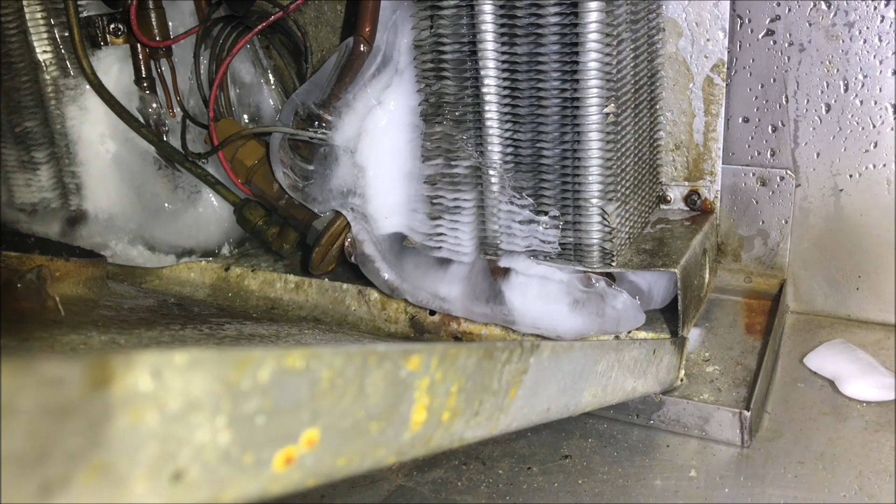Alright, so the first check we're going to do is check for a frozen evaporator coil. And the possible causes for that could be faulty evaporator fan or blade, a bad temp controller, which is super common. So our temp controller is set to whatever setting between 1 and 9, and it's a cooler. We're going below 32 Fahrenheit. Condensing unit is still running. Chances are you have a bad temp controller. If we have a backed up drain, if the door is not closing properly or sealing properly, and in a freezer we could have a bad defrost element, probe, or defrost clock.

Alright, so the next thing we're going to do is check our fans. So in this case we have two evaporator fans. Okay, in this case they are both running. We want to make sure the fan blades are not damaged. And from here we're going to move on down to the condenser fan and make sure it's running.

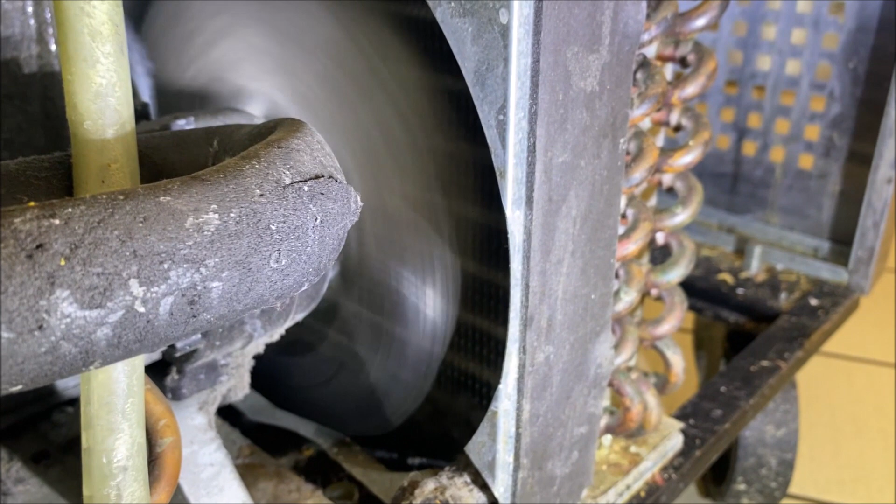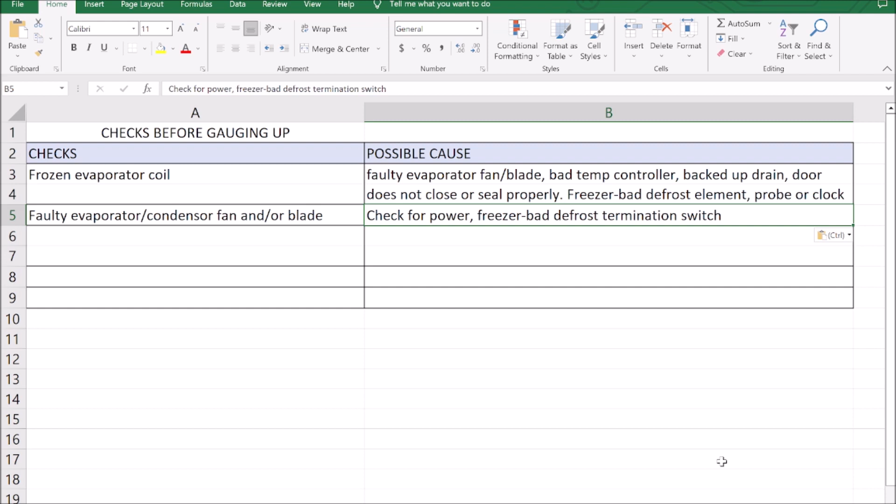Alright, so as you can see from there, our next check is to check for a faulty evaporator or condenser fan and or fan blade. And if we do have a bad fan, we want to check for power at the fan. And if we have a freezer, we want to check for a bad defrost termination switch and then replace as needed.

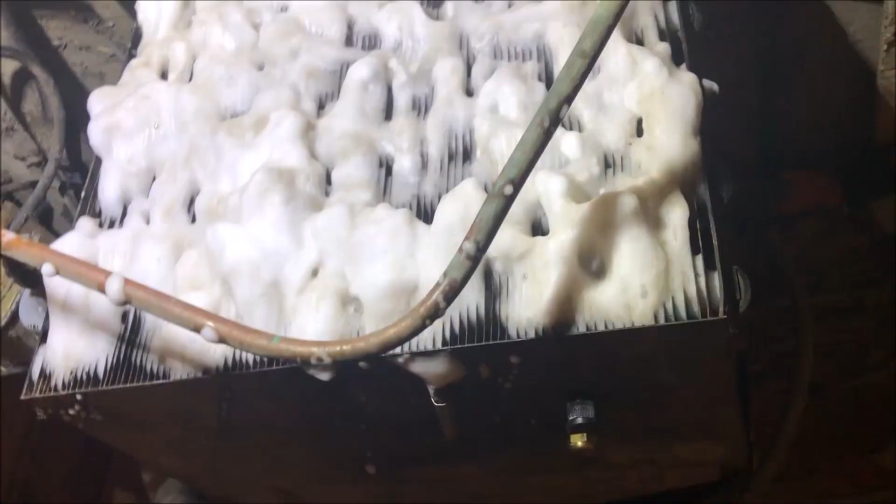The next thing we're going to check is the condenser. Is it dirty? Is it plugged? So we're going to use a brush and then we're going to just hit it up with Viper spray and shine a light through it and make sure everything's good and clean.

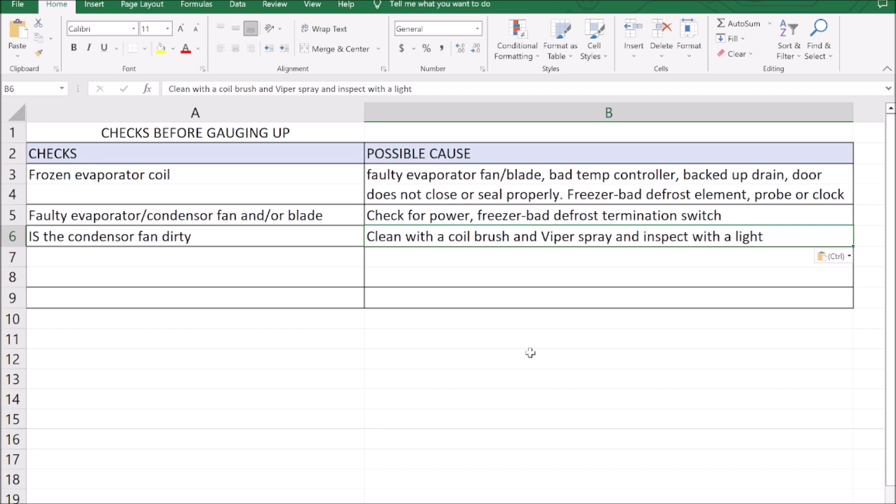Alright, so heading back over to our cooler freezer troubleshooting checks chart. Is the condenser coil dirty? And if it is, we're going to clean with a coil brush and then we're going to spray our Viper spray and inspect it with a light. It's important that you use the light because it can be very deceiving. If you brush just the front of the coil, the back of it could be filthy. It could be plugged with fryer oil. Who knows? So it's very important that you put the light in there and that the light's shining through every row of that condenser coil.

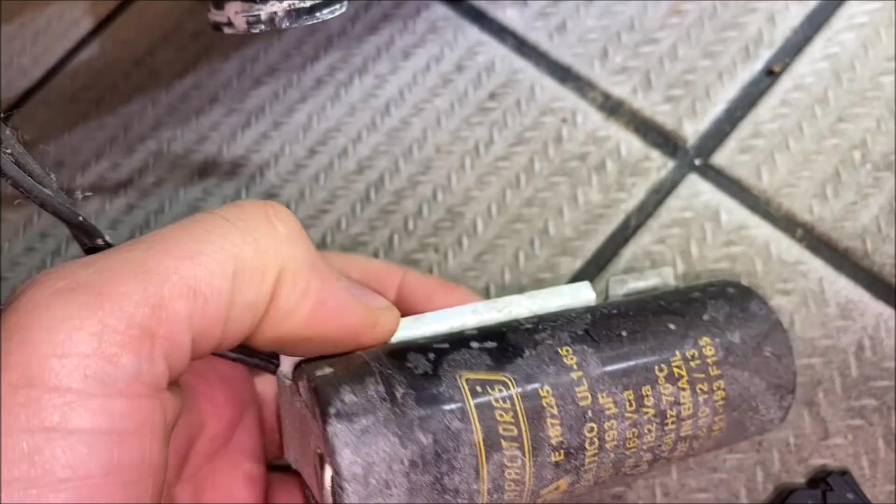Alright, so the next thing we're going to do is check the compressor. As you can see here, we're drawing 32 amps and going off on overload. So this is our overload right here. If we have power at this overload and there's no amp draw, you probably have a bad overload. This is the relay, and then we have the capacitor, which is going to help kickstart the compressor. So we can eliminate all three of these components with a 3-in-1 hard start kit. And hard start kit is installed, and just like that, we're drawing 7 amps. We've saved this compressor. This unit is running. We did not need to gauge up.

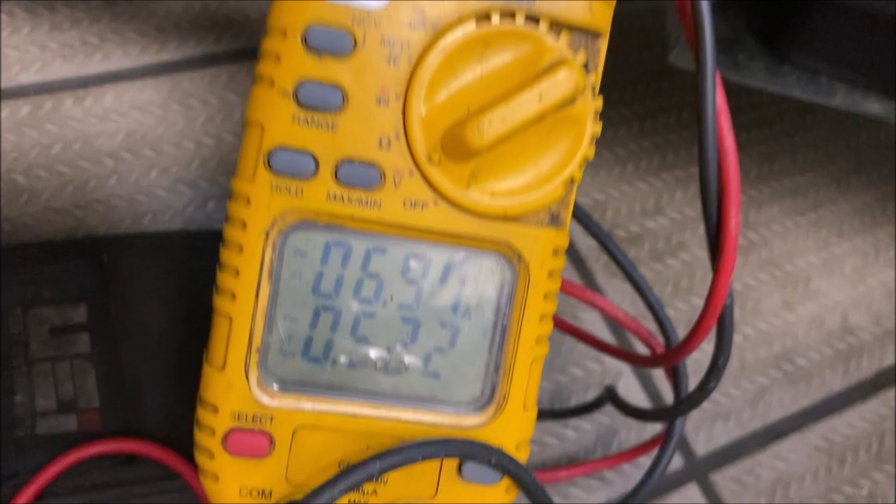And our final check is the compressor running? So if we have no voltage at the compressor, we're going to check the temp controller. So an easy check for this is if the condenser fan's not running. On most models, it's wired in series with this temp controller, so that's a dead giveaway. Okay, the next thing we want to check is, do we have voltage at the overload? If we have voltage at the overload and no amp draw, that overload is probably bad. We will replace it. Sometimes it fails for a reason, sometimes they just fail.

Okay, and then last is replacing that relay, overload and capacitor. So instead of stocking a bunch of capacitors, overloads, and relays, you can just put a 3-in-1 hard start kit, fire it up, and see if the compressor runs. If the compressor runs, based on the manufacturer's recommendations, whether it's under warranty or not, we recommend installing the OEM start components. But there are times that it's okay to leave in these 3-in-1 hard start kits. They are pretty reliable. And from my experience, they do not damage the compressor on these little compressors.

So as a new tech starting out, you're going to feel the urge to gauge up. You're going to be excited. You're going to have your gauges. And technically, you're not even supposed to gauge up. The word should be probe up, which I don't know if that translates very well, but you should be using your smart probes because we're critically charged. We don't want to put our gauges on and we pull some of the charge out when we take our hoses off.

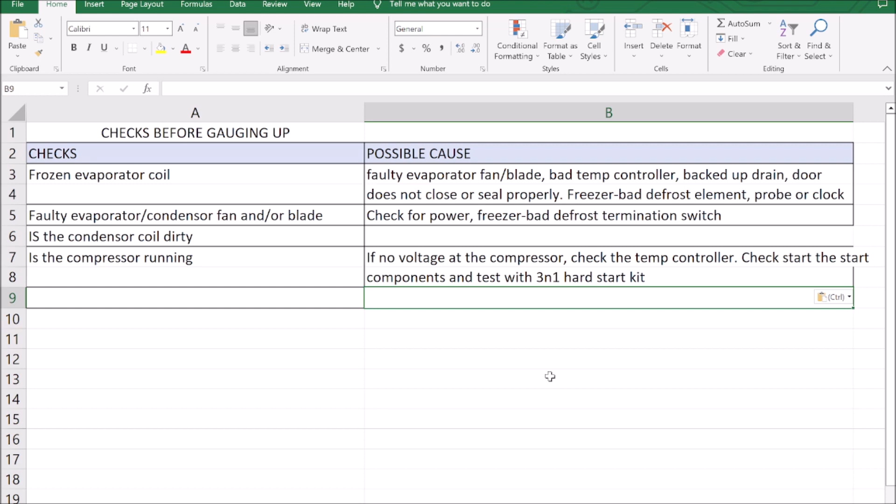If you go through all this and everything checks out, that means we have a refrigeration problem, okay? And that's when we'll go to our refrigeration troubleshooting flowchart, and then we start going through those steps. All right, so it's one thing at a time. Do not reverse the order. Try to follow the same steps every time, where it literally becomes muscle memory, and you can just coast on autopilot and go troubleshoot these things stress-free and very, very efficiently and quickly.